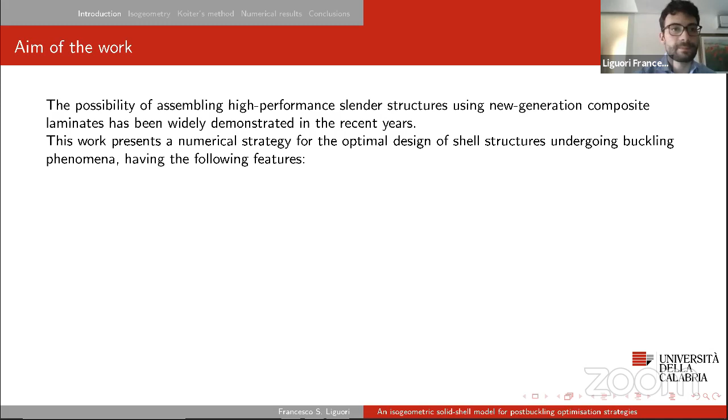The aim of the work is to present a numerical model to be used within post-buckling optimization strategies. The main feature of this model is that it is able to capture the fully nonlinear post-buckling behavior of the structure. It allows us to account for the worst case imperfection, and the strategy is applicable to general shaped structures.

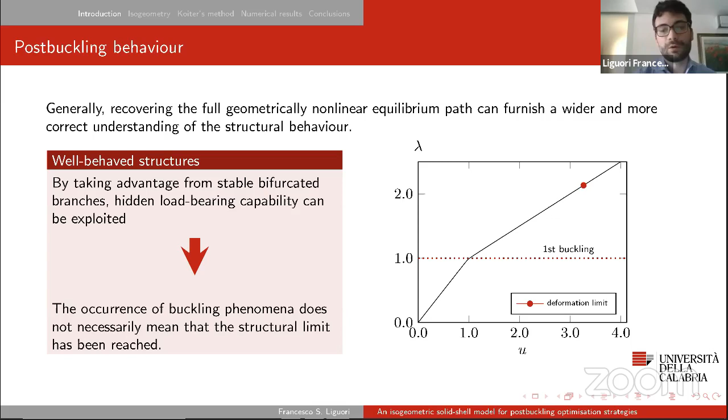Usually when designing a shell structure, the lowest buckling load is the reference load. However, there are cases in which this load is not a proper safe indicator, as the one reported here in the figure. Actually, also in the case of well-behaved structures, we can take advantage of stable bifurcated branches to exploit extra load-bearing capability.

When making a post-buckling optimization, we have two main issues. The first regards the discretization techniques, because when designing full-scale structures we can end up with many degrees of freedom in the numerical problem. On the other side, the evaluation of the equilibrium path can be computationally expensive, especially when the effect of many imperfections needs to be accounted for during the optimization.

With this work, we propose a strategy that makes use of isogeometric analysis to reduce the number of degrees of freedom of the numerical problem. On the other side, we make use of a specialized version of the Koiter method to predict the initial post-buckling behavior.

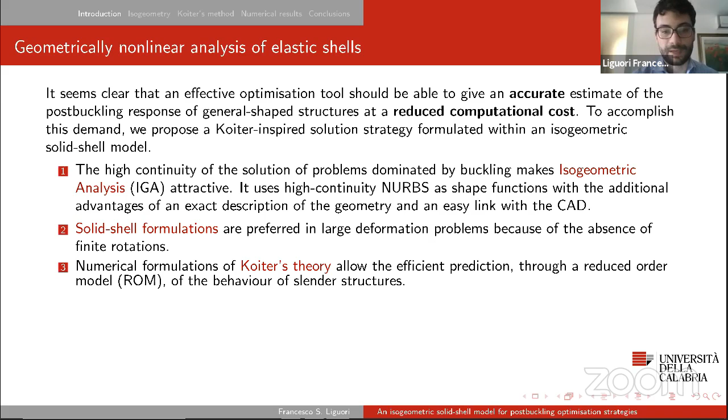Here there are some details about the solid shell isogeometric model. Everything is pretty standard, except for the MIP formulation, a strategy that allows us to preserve all the advantages of using a mixed format in geometrically nonlinear analysis within a displacement-based model.

To perform numerical integration, we make use of a patchwise integration scheme. In doing so, we have two main advantages: first, we can reduce the computational cost of the overall formulation, and then by using a reduced integration scheme, we can eliminate interpolation locking.

The Koiter method is commonly used in optimization of shell structures. However, many of the implementations regard simple geometries and simple post-buckling behavior.

With the version we used here, we can account for complex shaped structures based on the solid shell description and the isogeometric model, and capture nonlinear interaction between buckling modes.

At the end of the day, the Koiter method gives us a reduced system of equilibrium equations that can be easily solved. In this way, the solution of the geometrically nonlinear analysis is made efficient.

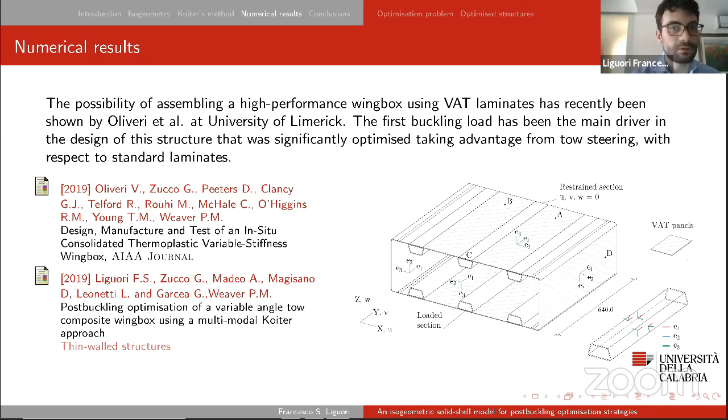I'm about to conclude with some numerical results. They concern the optimization of a composite wing box made of new generation composite material. This is the optimization problem: we want to minimize the out-of-plane displacement of the skin bay under some geometrical, technological, and mechanical constraints.

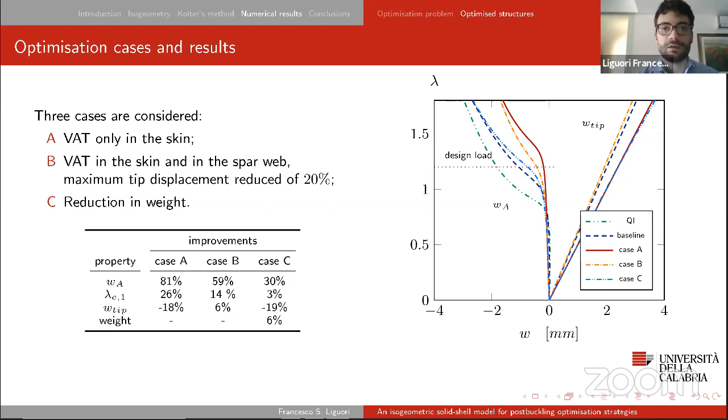But in all cases, we can see how we get good improvements with respect to the baseline solution. So, in a certain sense, we demonstrate that with this solid shell model based on isogeometric analysis and the Koiter method, we can optimize a full-scale structure in a reasonably computational time. So thank you very much.

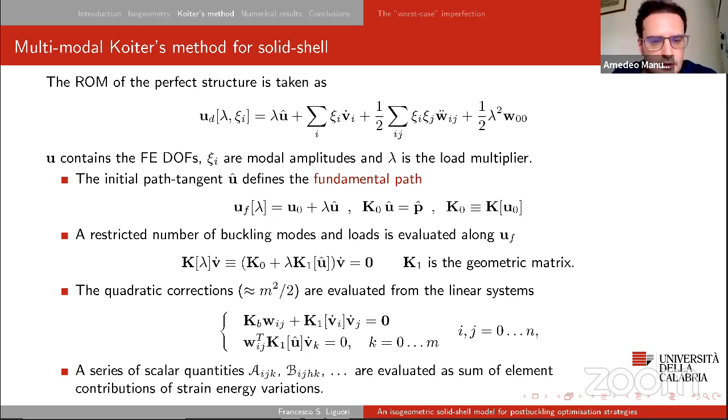Yes, I'm here. Okay, a GDQ-based study of the mixed mode interfacial response of composite specimens with a curved geometry. Okay, nice to see you, please.

Thank you. Ladies and gentlemen, good afternoon. The main topic of the talk is about a numerical study for the mixed mode... There is a noise, I don't know why. Maybe you are in the same room with Francesco, so one of the two has to stop or lower the volume. Let's try again, better to switch off the volume of one of the two devices.

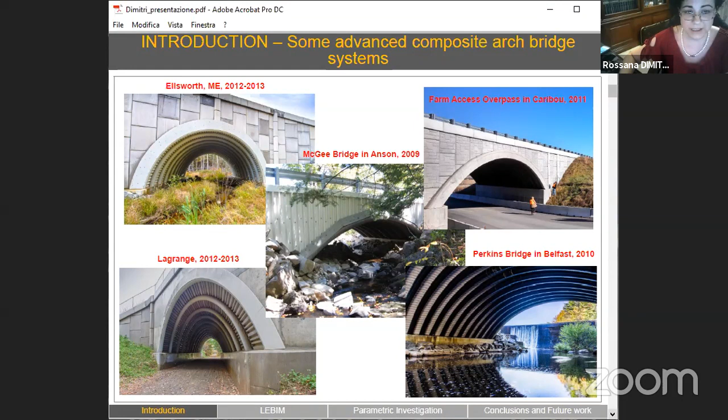As you can see here, for example, the same numerical approach could be used also to model simply supported curved beams with a vertical loaded distribution, as you can see here, in some practical examples of composite arch bridge systems.

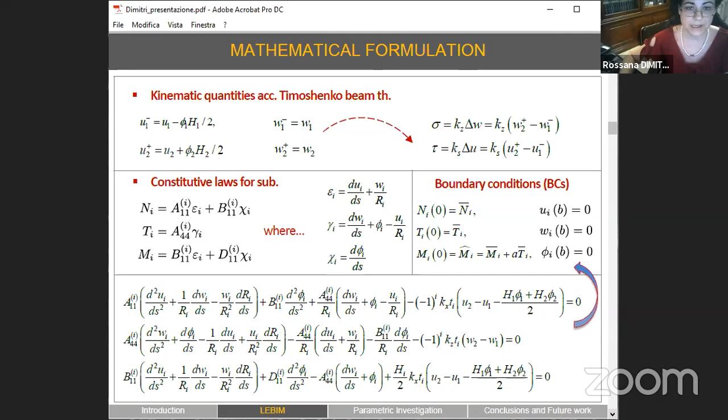We have to define the equilibrium equations for each sublaminate, at least in the adhesive portion. We then introduce the constitutive laws for each arm, together with the boundary conditions, and by combination of all these relations, we get the following set of differential equations, written in a coupled sense. These equations are expressed by means of the kinematic quantities, both in mode 1 and mode 2, in the longitudinal and orthogonal direction, in a coupled sense. So this set of equations is very difficult to solve in closed form. Here we provide just closed form solutions for a simple case.

I mean, a straight orthotropic double cantilever beam when the radius of curvature tends to infinite. In this case, we have to apply a suitable change of variables where the interfacial stresses are selected as primary unknowns.

After a long mathematical manipulation, which I don't have time to discuss, at the end we have the following set of relations which are uncoupled and easy to solve. After integration, we can obtain the closed form solution for the interfacial stresses as well as for the internal forces and the kinematic quantities, as you can see here.

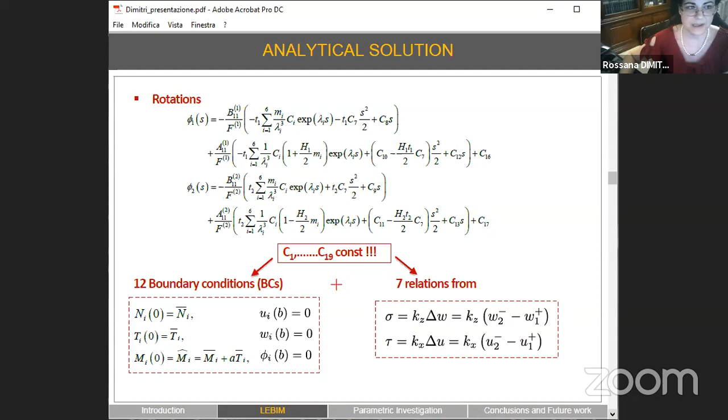In the same manner, we can find the closed form solutions also for all the other quantities in a static and energy sense, which are required to appropriately define the failure criterion to follow the delamination process.

As far as the numerical solution is concerned, the fundamental system of equations together with the boundary conditions can be easily solved in discrete form by applying the GDQ technique, which discretizes the nth order derivative of a function as a weighted linear sum of the functional values at fixed collocation points, by means of weighting coefficients determined through the recursive formula from the literature.

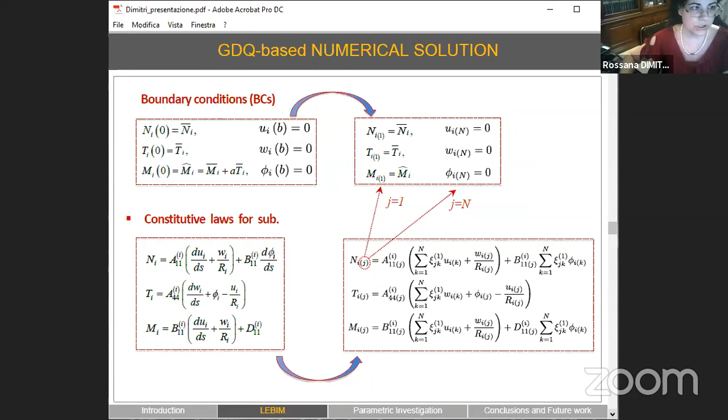Here are the discretized governing equations of the problem, together with the discretized form for the boundary conditions and the constitutive laws. In a context where the placement of grid points within the domain can significantly affect the accuracy of results,

we start the numerical study with a convergence analysis by considering the traction vector along the adhesive interface, defined by means of its normal and tangential components, and compute the L2 norm of the error, as you can see here, for different discretizations.

Here are the plots in a bilogarithmic way, where you can see the very fast rate of convergence of the numerical solutions for the different discretizations, where a very limited number of collocation points, ranging from 65 to 81 in our case, is required to obtain very accurate results.

So in the following, we continue to consider this optimum number of collocation points, equal to 65, for our analysis.

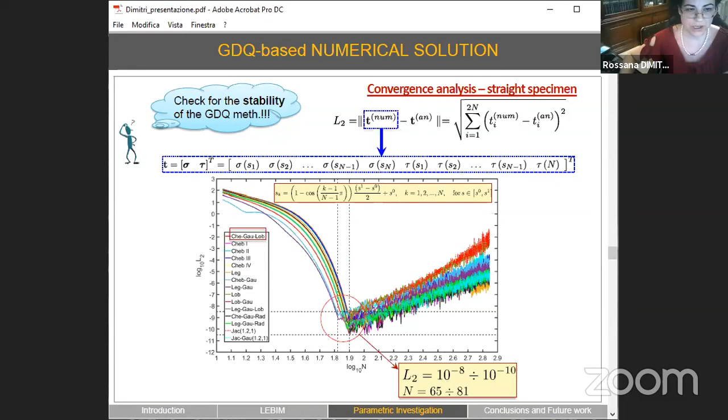Now we extend the numerical analysis of the adhesive interface response to curved members with constant and varying radius of curvature, where you can see here the list of five different geometries analyzed, including circular, parabolic, elliptical, catenary, and so on — just some examples among the most common geometrical shapes for structural applications, where the circular shape is considered the reference one.

For an orthotropic curved specimen in mixed mode loading condition, we plot the interfacial stresses first against the dimensionless bonding length for this unprecracked specimen and for different curved geometries.

You can notice the coexistence of a non-null value for both sigma and tau for all the geometries, which confirms the mixed mode interfacial behavior due to the mixed mode loading condition, but not only — also due to the geometrical curvature.

You can see also the mechanical response in a kinematic sense, where all the kinematic quantities are plotted here for different geometries, and where all the curves reflect the great sensitivity of the mixed mode behavior to its geometrical shape.

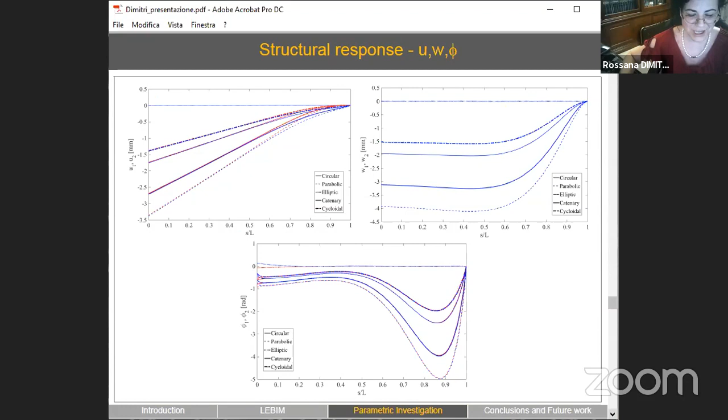For this limit case, among a large parametric investigation, I also show some results obtained by comparing the elliptical shape against the circular one, the reference one, for different radii of curvature.

While maintaining fixed the length span and varying the values of the rise, the last value of the rise here considered corresponds to the length midspan of the curved specimen.

As you can see here, for an increased value of the rise, both stress components maintain almost the same peak value at the crack tip and decay to zero with an oscillating behavior within a shorter distance from it, in a more localized zone.

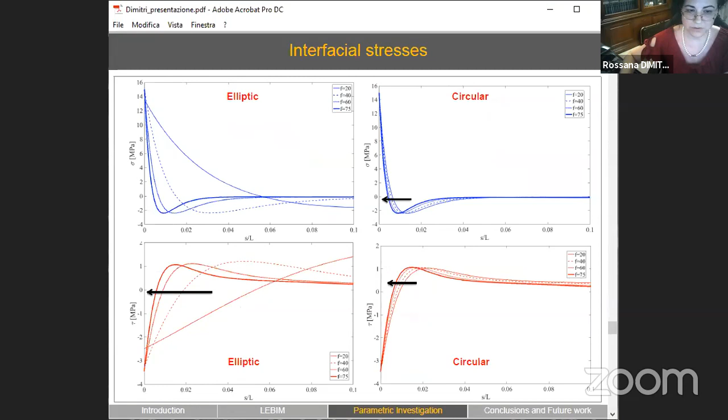The effect of the radius of curvature can be seen also here in a static and kinematic sense, where an increased rise makes the oscillating behavior of the internal action even more localized at the crack tip, while an increased value of the rise always decreases the overall deformability of the specimens.

Look at here, where in particular you can see the bold lines between both the elliptic and the circular shape are exactly the same, at least for the last value of the rise, because in this case the elliptic shape tends to revert to the circular one.

So we have proved the sensitivity of the delamination response for different curvatures and shapes for the curved specimen, which could be of great interest for design applications of adhesive joints and curved members. And we have also proved the efficiency of the generalized differential quadrature approach to treat this kind of problem.

A possible further extension of the work could include the nonlinear softening branch, typical of cohesive zone modeling for fracture mechanics problems, and possibly extend this kind of numerical method to shell structures. Thank you very much for your attention.

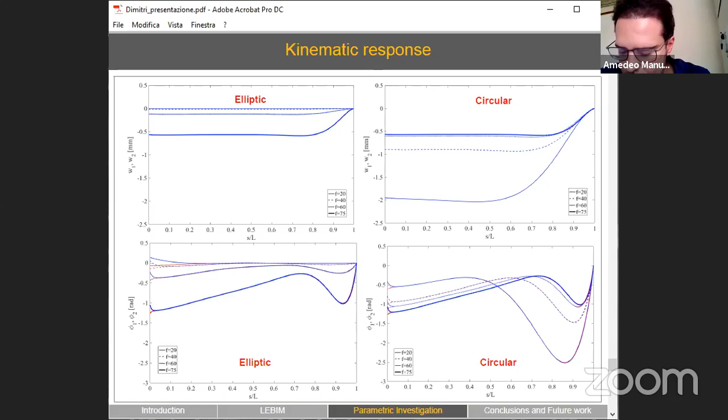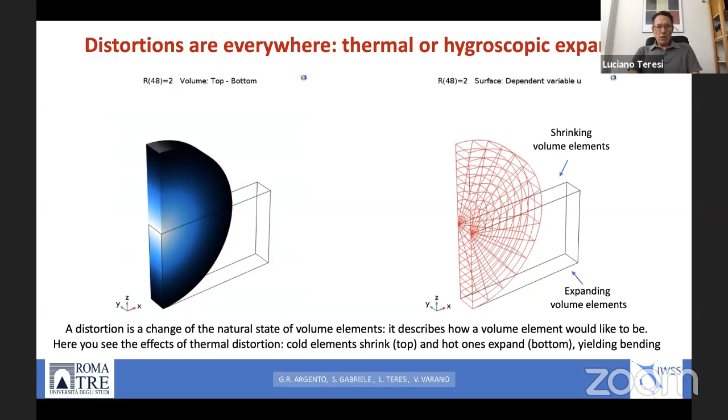Growth is a very general word, and different contexts use different words. For an engineer, growth is simply a pre-strain, and the pre-strain can be very large. Here is an example of using pre-strains, or distortion, to change the shape of a solid. On the left you see the huge displacement of a solid, and on the right you see the cause of this huge displacement: a growth, a distortion, which is different along the thickness. At the bottom, volume elements become larger, and at the top they become smaller. Because of that, you can change the shape, and it is quite easy to change the shape of a solid using this technique.

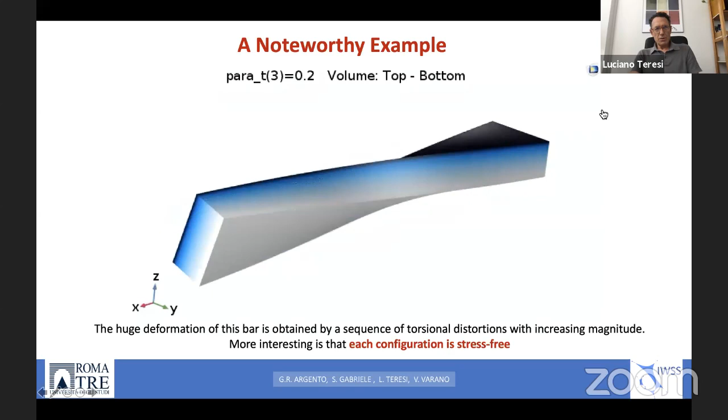This deformation is very large, and it would be very difficult to get the same deformation applying loads, because you would have to use live loads, and the loads must change during the deformation - so it's very difficult. Using this approach, it is very easy, and also easy from the computational point of view. You can get many different shapings. Here you see another very interesting shaping.

What you see is a sequence of configurations. Each configuration corresponds to a given distortion, and importantly this distortion is compatible. It means that all these shapes are stress-free.

There is no stress in this solid, and this is the goal of the growth of a living tissue. Growth must not induce stress in the tissue. You want only to change the shape, but not the elastic energy. You don't want to stress the solid.

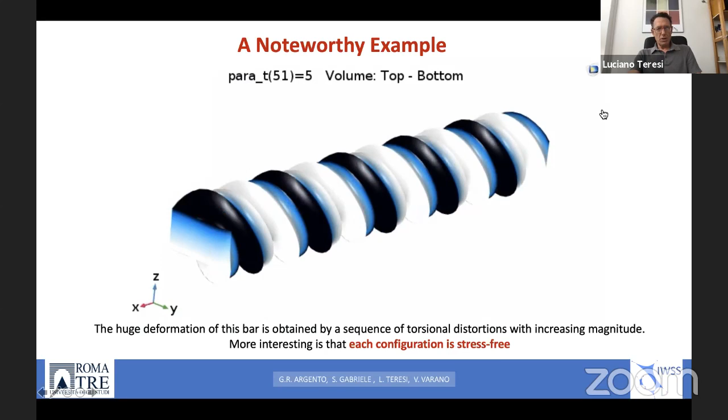Here is another example. You can design a morphing with distortion. So here we design the formation of a ribbon, and you will see how this flat bar will round up into a cylinder, and eventually you get something very similar to a ribbon. Again, it's very easy to get this change of shape.

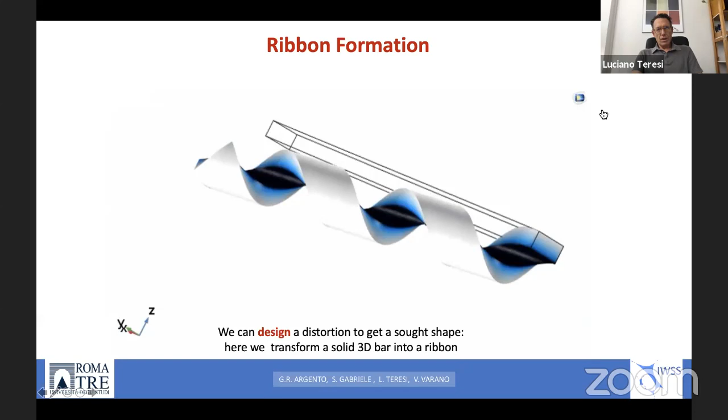Now you can use this technique also for shells, and here is our contribution. A shell is a very special 3-dimensional solid. Essentially it's a surface with an extrusion along the normal, so you can use this notion of 3-dimensional distortion also for a shell-like body.

These two fundamental forms: the first is related to the membranal strain, the second to the bending, the curvature of the middle surface. You can play with these new degrees of freedom, and for you these fundamental forms are targets.

So what you want to do is morph a shell such that its fundamental forms are as close as possible to these two targets, the first and second fundamental forms. Here is an example, very similar to the previous one. Now I am morphing a shell. So this is a shell.

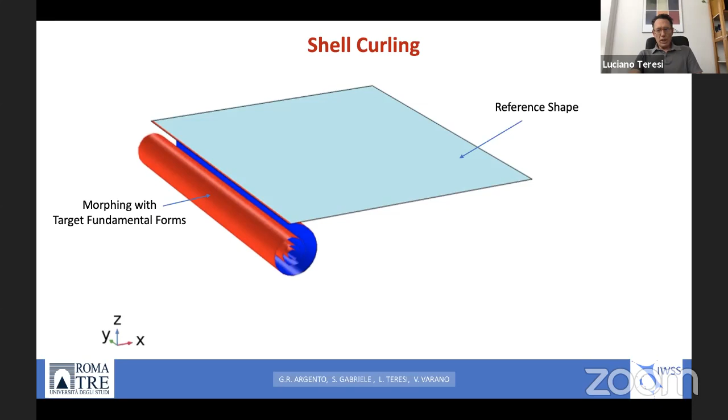This is my last slide. The final slide is just references, and I thank you for the attention.

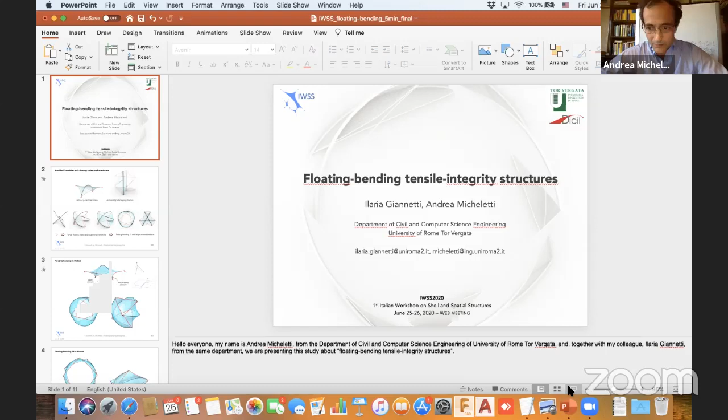Yes, please Andrea. Yes, I need to move this. Can you see my screen? Yes, very well. Can you hear me clearly?

Okay, so I'm presenting a joint work with Ilaria Giannetti, and we are both from the Department of Civil and Computer Science Engineering of University of Rome Tor Vergata. It's a conceptual work about floating bending tensile integrity structures.

It comes from the observation that if you have a diamond type tensegrity structure, we can see this diamond shape formed by four cables connected to one of the bars. And then you can see some similarities with arch-supported membranes, like this one I sketched here.

So the idea is to modify the tensegrity modules by curving the struts and adding the membranes. So we patch each diamond of the module with an arch-supported membrane, and by doing so we can transform, for example, the classical T3 module, which is a well-known tensegrity module, into this structure.

And then here I put again the classical T3 module to compare the figures, to see that the internal volume is much larger. So one of the features of this tensegrity module is that the bars are always inside the structure and cables outside, and then it's difficult to exploit them.

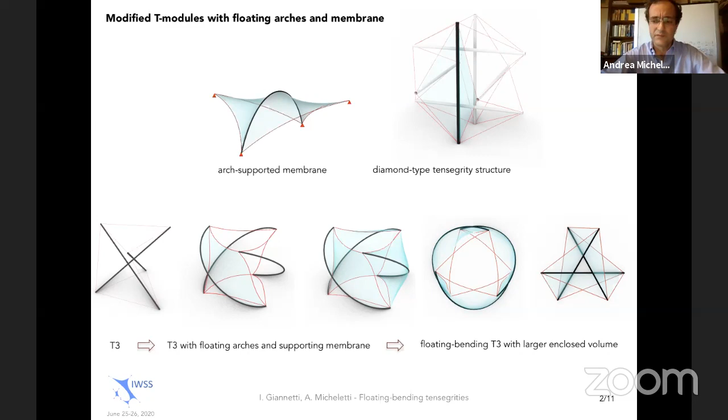And then so the name—we preserve the tensile integrity of cables and membrane, and we suspend the arches. So the first thing we did is to try to do the form finding in the simplest possible way. We use MATLAB, and then we use the membrane elements and cable elements.

As simple constant stress elements, and we added the stick and spring element for the arch. Basically it's a normal linear element, but we attach to it two springs. One—let's say we have a spring between one element and the next one, which takes into account the bending with this rotational spring. And also, if you have three consecutive elements, we consider the dihedral angle, which we can define with three elements, and so there is another spring.

And in this way we have a simple model. We can minimize the elastic—it's a linearly elastic model—considering a large displacement regime. And so we minimize the energy and we find the equilibrium shape.

And so this is the result for the example I showed before, and this is the equilibrium geometry we obtained. Then we did the same with another module, which is called the T4 module. This is one first approach. Then after this, we saw that there is an equilibrium shape.

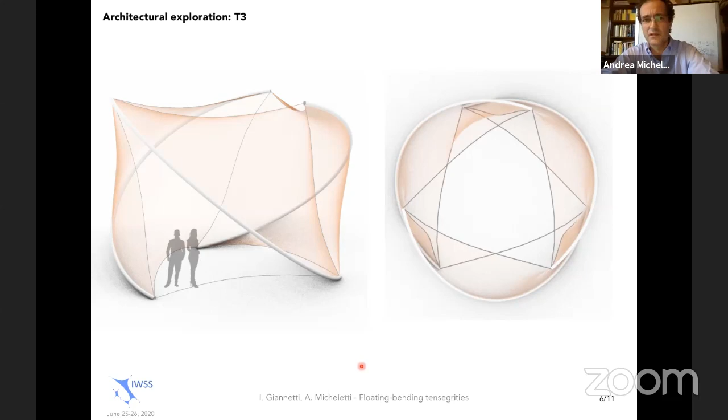And then we tried to see some simple applications to use these shapes for some architectural application. This is for a pavilion, and this one can be, for example, for social distancing.

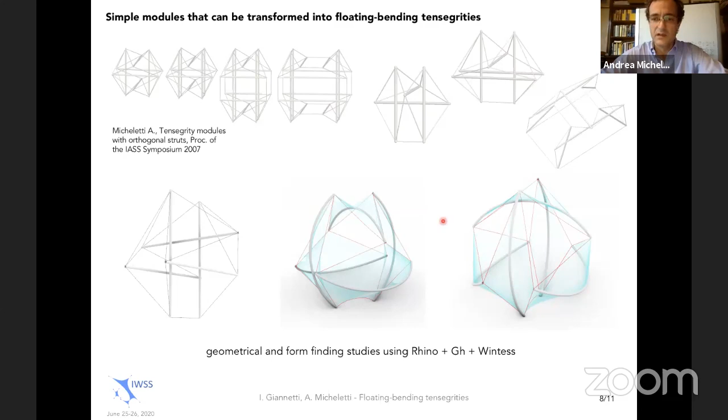For example, this one we can transform into a floating bending tensegrity structure. Tensegrity systems have sometimes been regarded as balloons by Buckminster Fuller, because you always have tension outside and compression inside, like in a balloon with compressed air inside.

And then you can also imagine that you can transform this into a floating bending tensegrity structure.

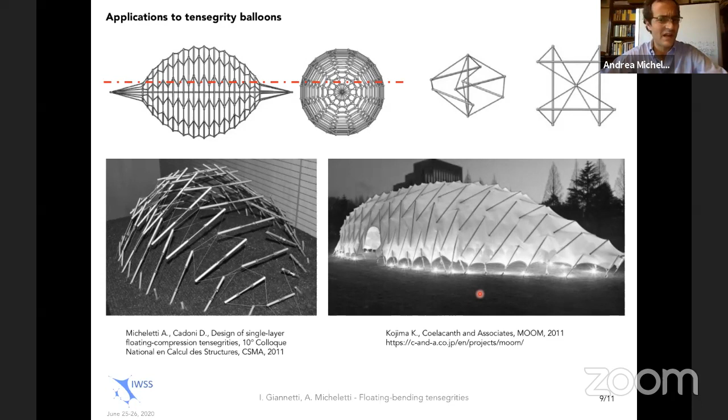We are trying to study this problem. It's very interesting. Let me go back a second to this one - you can see here a continuous surface, pre-stressed surface with singularities. There are two types of singularities, one for the cables, the other for the arches.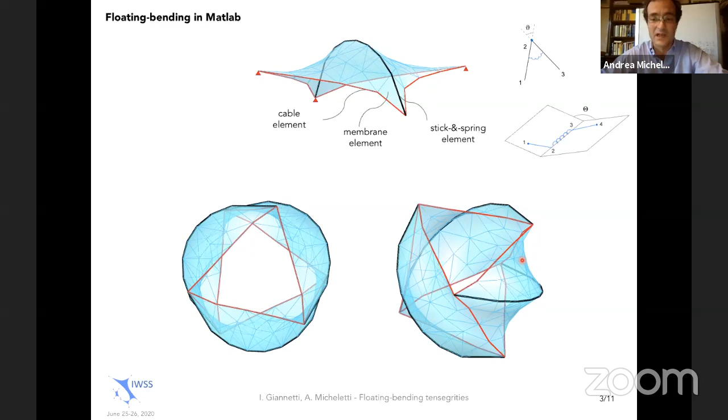Tensairity, where you also have this structure, contains an inflated balloon with reinforcement, so there are some similarities. This is a nice pavilion which was awarded last year at the IASS in Barcelona, which is not a diamond type, however. So the question is whether you can transform this into a floating bending structure.

So the main questions are: can we have funicular arches? Or in any case, we would like to minimize bending and torsion in these elements. And also we need to study buckling and superstability of this - superstability is something well known in the literature.

And also we would like to do a trade-off analysis between structural efficiency and deployability.

I want to thank again Professor Ramon Sastre and also Diana Peña for how to use the software, and also Professor Fraternali for useful comments during the preparation of this study, and also the students who worked on this subject over the years.

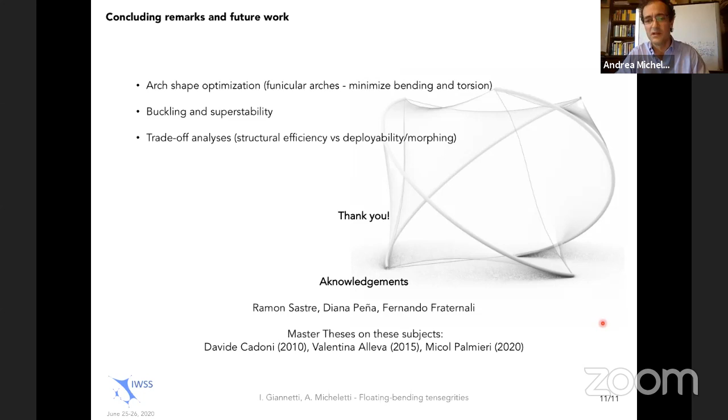I don't know if you get a linear equation, but you probably need to switch between techniques for form finding. The problem here is you have simultaneously tension and compression, so it's a bit more complicated with respect to tensile structure or masonry structure. Usually what is done is to switch between equilibrium operator and stress operator, which are known terminology in the literature. You need to define a stress operator. The equilibrium operator is easy to generalize in this case, but the stress operator is harder to generalize for these stick and spring elements. That's a quick answer, let's say.

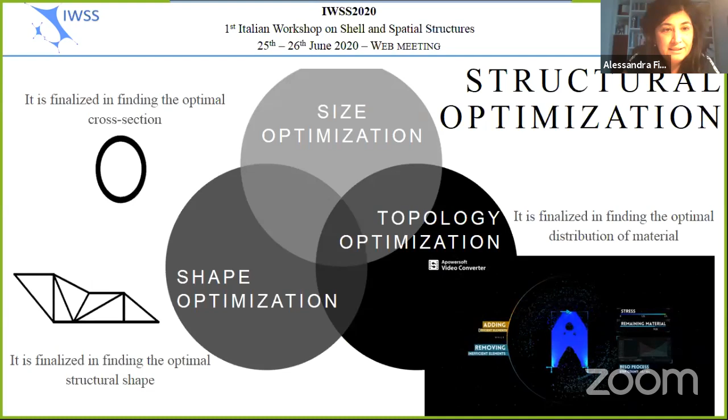The design optimization refers to size, shape, and topology. The optimal solution is obtained by a differential evolutionary genetic algorithm named Galapagos, where a suitable combination of mutation and crossover operators is adopted to achieve the best solution. The Galapagos solver is implemented within the Grasshopper working environment, an innovative parametric Rhino design tool. The analysis concerns three different typologies of simply supported steel beams: a truss scheme, an arch with orthogonal ropes, and a network arch. The span length is equal to 20 meters.

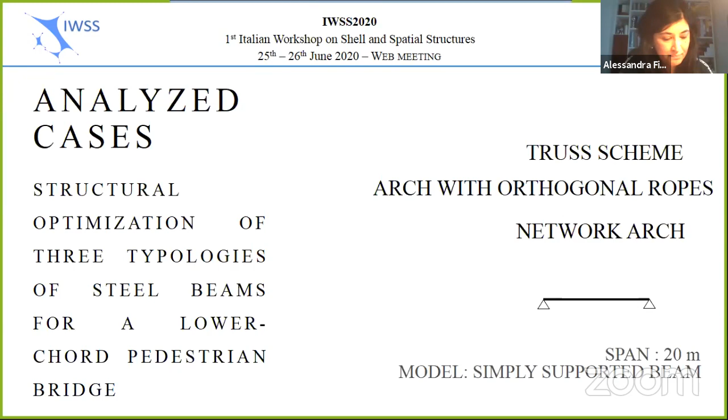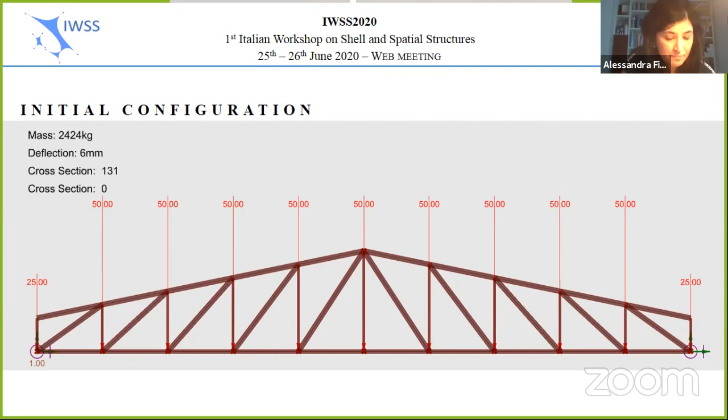Starting from the truss scheme, after implementing the geometrical model through the workflow in Grasshopper, and in the same way the constraints and loads, an initial configuration with the loads is defined. The minimum weight optimum design is posed as a single objective optimization problem, subject to constraints formulated in accordance with current Eurocode 3. So we formulate the optimization problem as finding the best vector of input variables to minimize the weight, satisfying the constraints imposed by Eurocode 3.

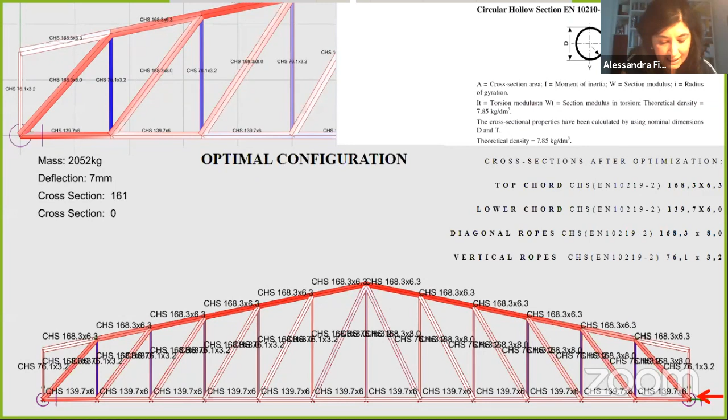Here you can see the optimization algorithm. In this case the design input variables are represented by the geometrical dimensions of the cross sections of the different components of the truss, and by the outer and internal arrangements of elements. This is the optimal configuration, and these are the optimal circular cross sections selected by the algorithm, along with the normal and bending stresses.

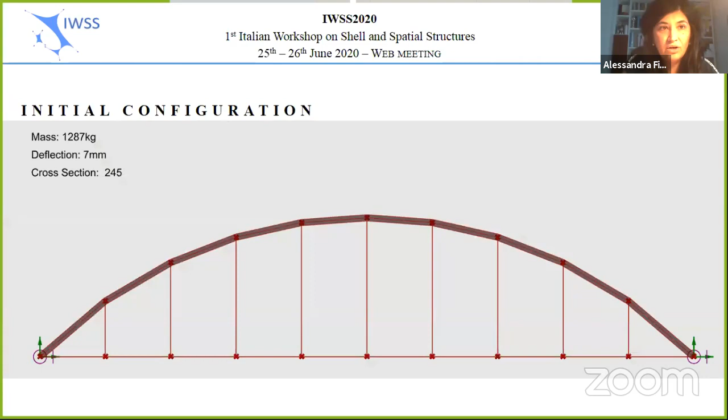The same procedure is applied for the arch with orthogonal ropes. After definition of the geometrical model, constraints, loads, and an initial configuration with loads, the optimization procedure is run. In this case, the design variables are represented by the cross sections of different components, by the arch curvature, and by the internal arrangements of elements.

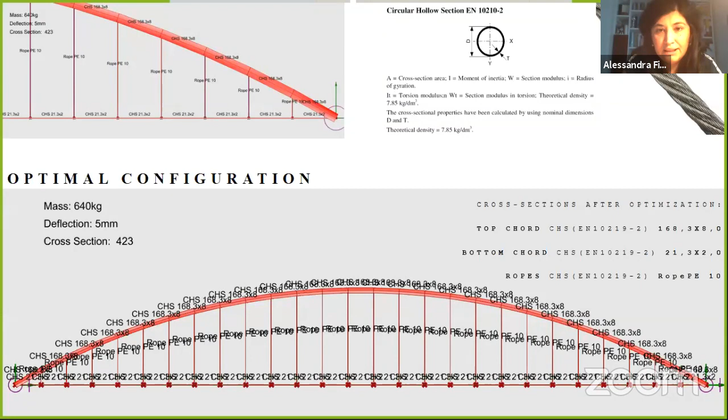This is the optimal configuration, with cross sections according to Eurocode 3 prescriptions, and normal and bending stresses. Finally, the network arch is analyzed in the same way, and again the design variables are represented by the cross sections of different components, the arch curvature, and the internal arrangements of elements. This is the optimal configuration with cross sections and normal and bending stresses.

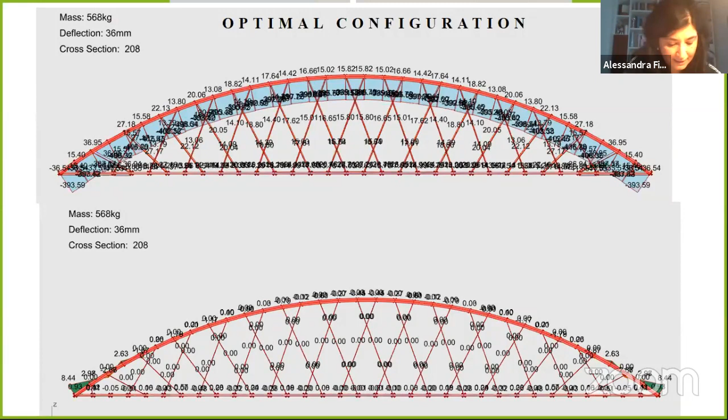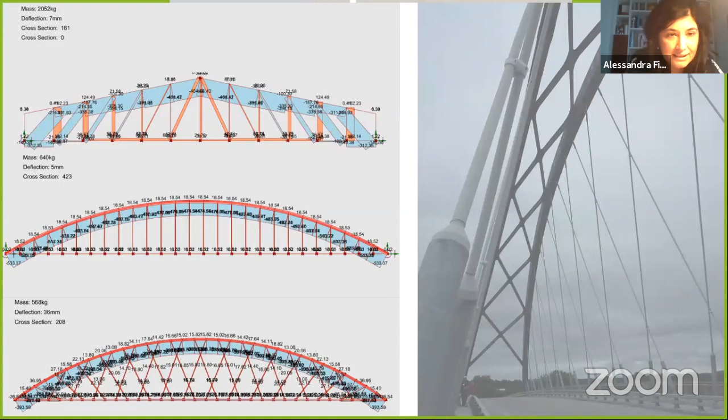By comparing the previous results, some considerations can be drawn. The network arch results to be the best among the solutions, since it is characterized by minimum weight and stresses. Moreover, the optimal solution is consistent with some previous literature studies. The cross section of the arch results bigger than that of the bottom chord, while diagonals are characterized by the smallest values of cross-section width and thickness, according to the distribution of intensity and stresses. The optimal configuration confirms that optimal arches are always rather shallow, in accordance with analytical evidence we recently achieved. Thank you for your attention.

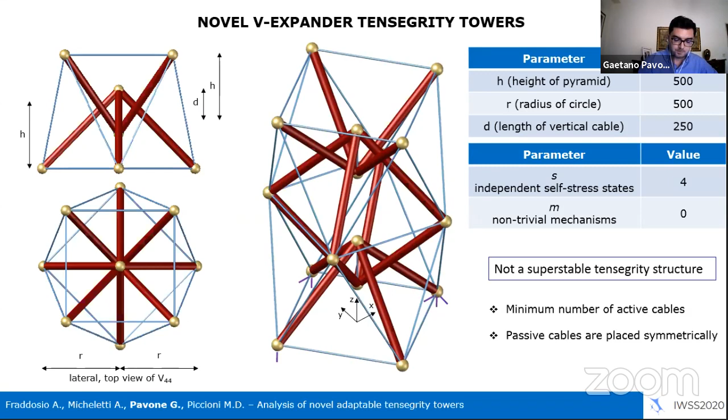The modular tower analyzed is composed of 2 modules sharing 4 horizontal cables, and the tower has 4 independent self-stress states and no mechanisms in 3-dimensional space. The self-stress states are not localized in each module; indeed, each of them involves different elements of the tensegrity tower.

This implies that to change the length of a not-shared element, it is necessary to adjust not only the length of the element belonging to the same module. Support conditions of the tower are located at the base nodes, and the tower is opportunely constrained to remove the rigid body motions in space. Moreover, such tensegrity tower is not a superstable tensegrity structure.

Different novel shape-changing V-expander tensegrity towers can be designed by choosing appropriate sets of active and passive cables respectively, in order to achieve various configurations. In this work, we are interested in seeking how it is possible to obtain different shape changes by means of the minimum number of active cables.

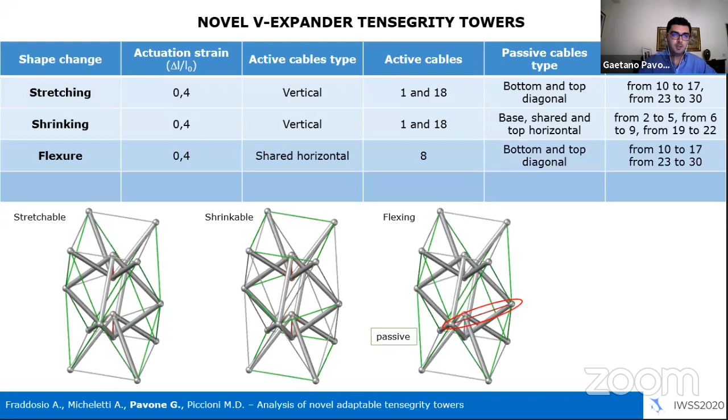It is worth noting that active and ordinary cables have the same material stiffness properties, while passive cables are characterized by very small Young's modulus. An initial symmetric self-stress stable configuration can be obtained by applying an initial prestrain at symmetrically placed passive cables equal to 0.2. Shape change of the towers can be obtained by shortening specified active cables by a predefined amount equal to 0.4. In this preliminary work, we focus our attention on the following shape changes: stretching, shrinking, flexure, and torsion.

Stretchable tensegrity towers are characterized by the fact that all elements tend to linearly increase their axial forces. In particular, struts, shared horizontal cables, and vertical cables achieve internal forces higher than the initial stress, up to 50%. A slight variation of tensile internal forces can be observed in the remaining horizontal and diagonal cables. The total elongation of the structure, equal to about 13%, can be measured for these towers.

Shrinkable tensegrity towers show different behavior of the struts. Compressive internal forces in the outer struts are greater in absolute value than those of inner struts. Moreover, inner struts and vertical cables have the same behavior in absolute value: their internal forces increase until actuation strain is smaller than about 0.2, and then decrease. Shared horizontal cables increase their tensile internal forces by about 50%, and the length of the shared horizontal cables increases by about 15%.

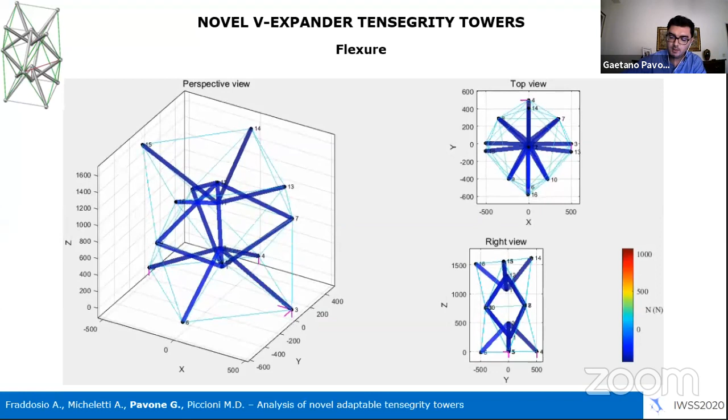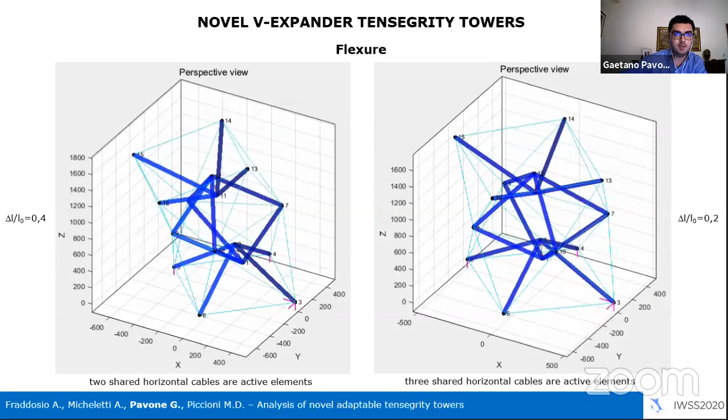Flexing tensegrity towers show that axial forces in vertical cables increase, and axial forces in the elements are strictly related to the choice of active and passive cables. In this example, we consider one of the shared horizontal cables as an active cable, but we can also choose different active cables, different sets of active cables. On the left, two shared horizontal cables are considered as active cables. On the right, three shared horizontal cables are used in order to manage the direction of the bending and flexing of the tensegrity towers.

Finally, twistable tensegrity towers are characterized by a clockwise rotation of about 5 degrees. Bottom struts increase their compressive internal forces in absolute value, while internal forces in the top struts slightly decrease. It can be observed that cables belonging to the bottom module increase their internal axial forces. This is due to the activation of the bottom active cables.

Finally, preliminary analysis of shape change of novel adaptable tensegrity towers has been performed by means of cable actuation. Different kinds of shape change have been considered, like stretching, shrinking, flexure, and torsion. The choices of the active cables as well as the passive cables satisfy the following criteria: minimum number of active cables, and passive cables placed in symmetric positions. Further analysis will be conducted in order to investigate the influence of geometrical and material parameters on the shape change capabilities of the tensegrity towers.

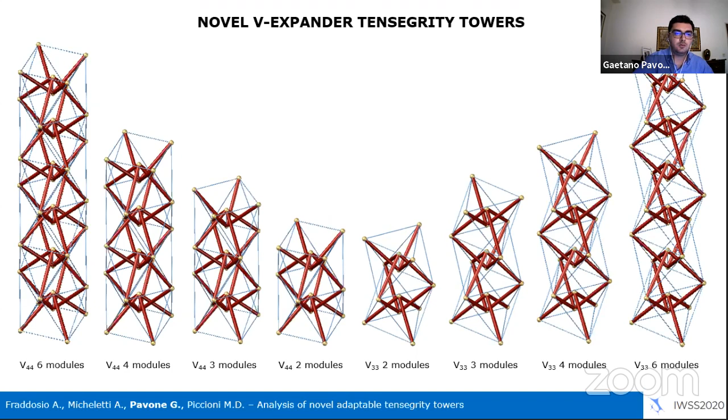Different topologies can be considered for the elementary cell of the tower, with 2, 3, or 6 struts joined at the nodes of the vertical cables respectively. In this slide, we show how the novel V-expander tensegrity cells can be assembled for a tower with 2, 3, 4, and 6 modules assembled longitudinally, and for example, a grid with 8x8 modules.

The determination of the minimum number of active cables allowing for multiple shape changes, and the effects of different load conditions, will be numerically and experimentally investigated in our laboratory at the Polytechnic University of Bari. Thank you for your attention.

Thank you so much, Gaetano. Very nice work, very interesting. I have a question from Ramarao Mallela. I read for you. Yes.

How strong are the tensegrity towers with respect to torsion? In case this tower can resist torsion, perhaps it can be used to resist torsion due to wind loads subjected to hurricanes and cyclones.

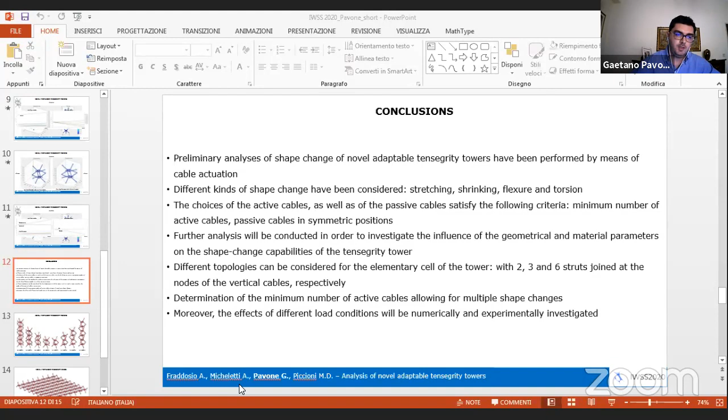So this is a preliminary work, and the effect of different load conditions will be numerically investigated in the future. If we consider the load due to wind subjected to hurricanes and cyclones, we would have to perform a further analysis in order to investigate this kind of load.

Thank you so much. This is still an exploratory study, so we didn't put wind load yet on the towers. But of course, if you make the elements big enough and strong enough, it depends how much bigger—maybe if it weighs more than a conventional structure, maybe it's not convenient. Let's say these towers are good for soft robots, so that maybe for human interaction, they can get stiffer or softer according to various situations. That's the preferred application in the literature.

Yes, of course. Thanks, Andrea. Okay, we can move on.

Very interesting paper entitled Virtual Element Method for Solid and Structural Mechanics, by Edoardo Artioli.

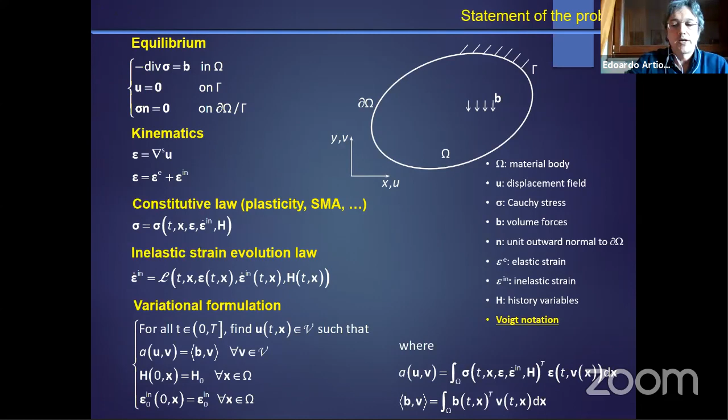Very much in the classical FE fashion, we build local approximations for our displacement field starting from the element level, the polygon level. We call it the virtual admissible displacement field, VH, built by choosing a positive integer k representing the order of accuracy of the method. This is the collection of vector-valued functions that have sufficient regularity over the polygon domain and are defined as follows.

They have a Laplacian which is a polynomial of degree up to k-2 over the element, and are a polynomial of degree k over the element boundary. That's all we know about our virtual element functions. So the idea is that for functions VH, they are totally known explicitly on the element boundary, fully implicit—meaning not known inside the element—and globally continuous over the element boundary.

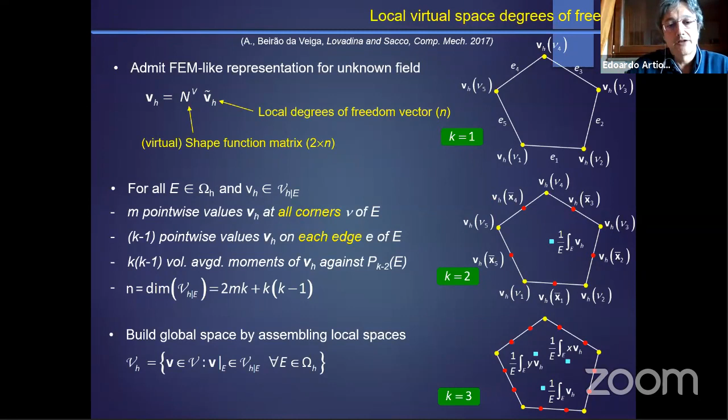The main message from this quite large gallery of numerical experiments is that we have assessed the method's accuracy, precision, and robustness, and its versatility with respect to the chosen constitutive model. We've found that the method shows low to no sensitivity with respect to mesh distortion, and more importantly, anything connected to a standard nonlinear FEM implementation can still be retained.

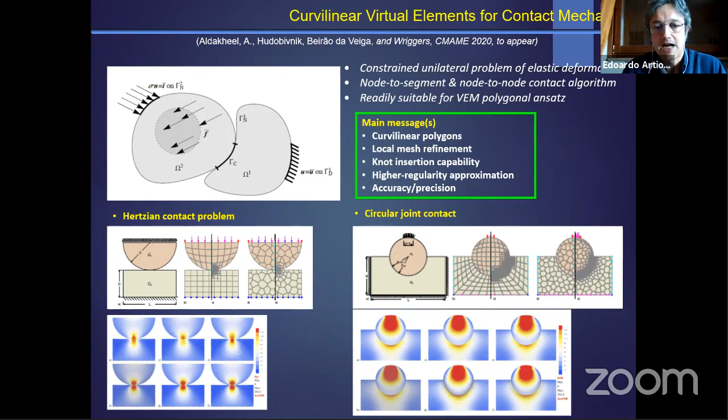Moving on, another interesting area that we have been recently working on with Professor Sacco from the University of Naples Federico II, and Professor Marfia from the University of Roma III, is the development of a VEM-based fracture path tracking algorithm for 2D cohesive fracture. Here again you can see that we have exploited some of the key features granted by the method: the possibility of dealing with evolving interfaces within the domain of interest, and also the possibility of having refined forward and backward mesh refinement strategies for an efficient fracture path tracking algorithm.

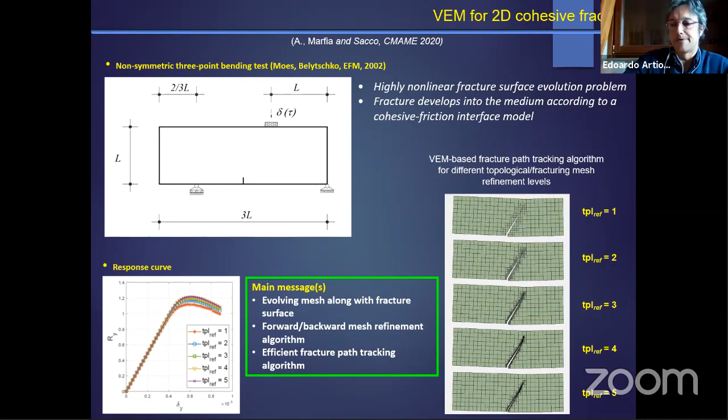Another interesting field we have been involved in recently is related to the computational homogenization of fiber reinforced composite materials, either with a double periodic arrangement or in a random arrangement. Without giving too much detail, this problem again leads to solving a standard elliptic problem over a complex 2D domain, which is represented here, which is the unit cell domain for the composite material.

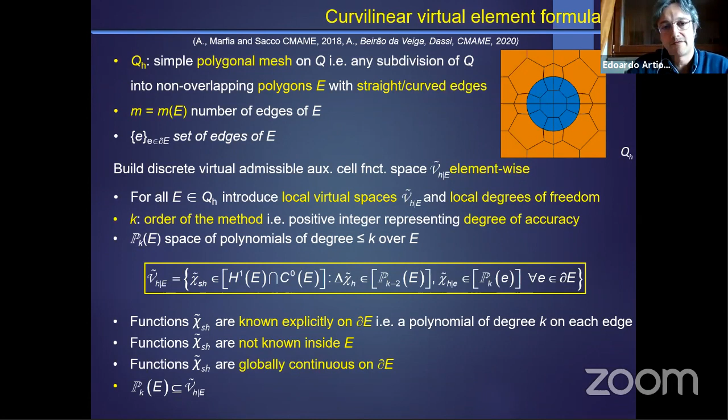We proved that using virtual elements is quite an efficient strategy to derive the solution to such a problem, for many reasons. As you can see here, we have basically a very similar construction of the method with respect to the initial case. In this case, we have the capability of exactly reproducing the curvilinear geometry of the interface between the fibers and the matrix, and pretty much everything is very close, very similar to the initially presented construction. We have tested the method for different types of meshes, for different orders, higher orders, confirming accuracy and convergence.

And lately, with Lourenço Beirão da Veiga and Marco Verani from the Politecnico in Milano... You are over 10 minutes. Okay, just one more slide, and I'm done.

Yes, we have extended the analysis to random composite materials and to more involved complex fiber cross sections, getting quite good results as well.

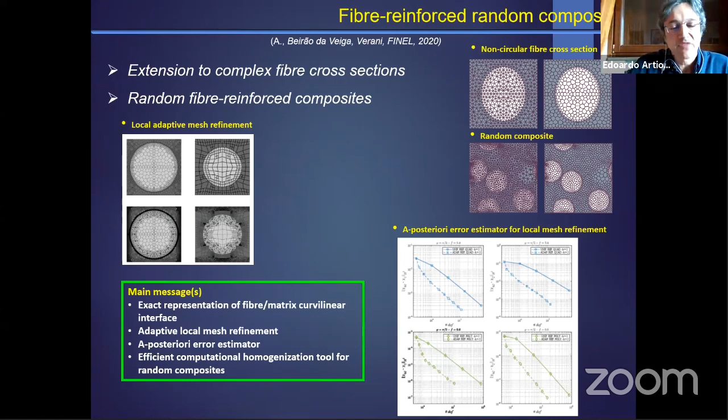The last application, related to plate problems, is done in collaboration with Professor Taylor and Lourenço Beirão da Veiga, and is basically a technique that we have devised, borrowing the so-called linked interpolation from finite element analysis, which in this case proved quite efficient in deriving shear locking free plate virtual elements.

Just a very quick conclusion: we think that the VEM is a numerical tool with potential in solving applied mechanics problems, and that there are many features that make it quite interesting as a potential alternative to standard finite element methods, and that there's a lot more to be explored in this field. Thank you for your attention.

Thank you so much, Edoardo. I think you have really an encyclopedic knowledge about virtual element method. Are there any questions about this very interesting paper? No question, so if you have a question please post it on chat and we move on. Sorry Edoardo, because we are a little bit late. Sure, okay, thank you, thank you so much.

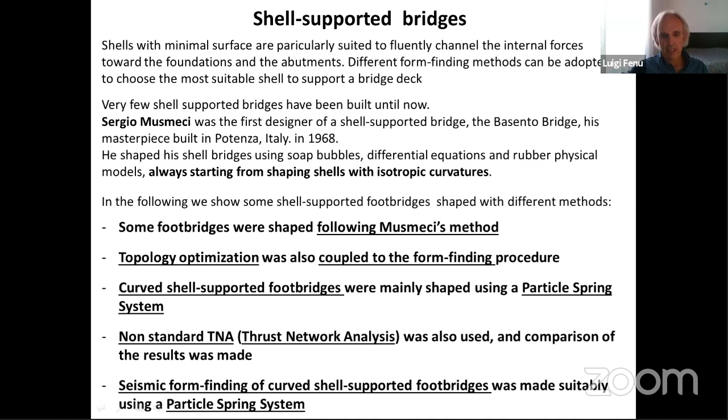Finally, we are now studying the seismic form finding of curved shell-supported footbridges, mainly using a particle spring system. Here we see our initial work, following Musmeci's method of shaping an isotropic surface and then reducing the transverse curvature. Some years later, we tried to follow his method and to shape a footbridge.

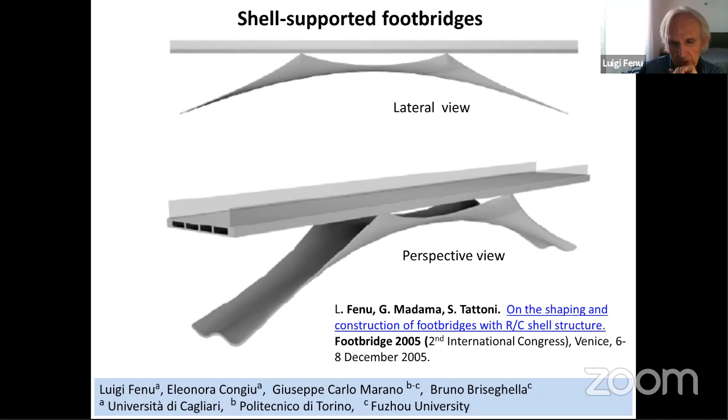We also studied how to build it using ferrocement, initially with a tension structure made of steel wires, and then obtaining ferrocement by spraying the concrete to finally obtain the shell. This work is from 2005, and this is the footbridge.

Then we applied topology optimization together with the form finding method. This method was also applied to a real bridge, the Sandona Bridge, close to Venice.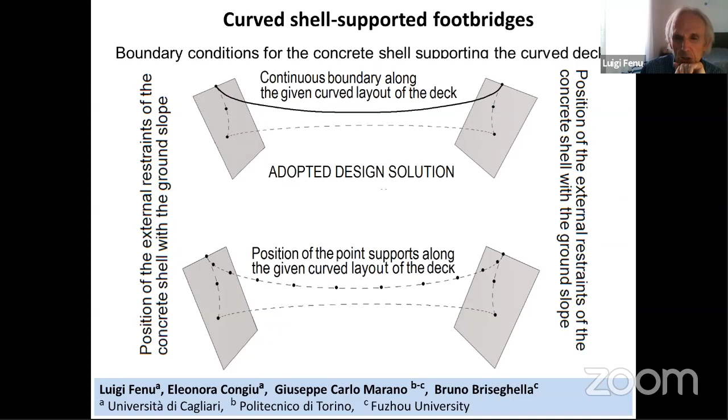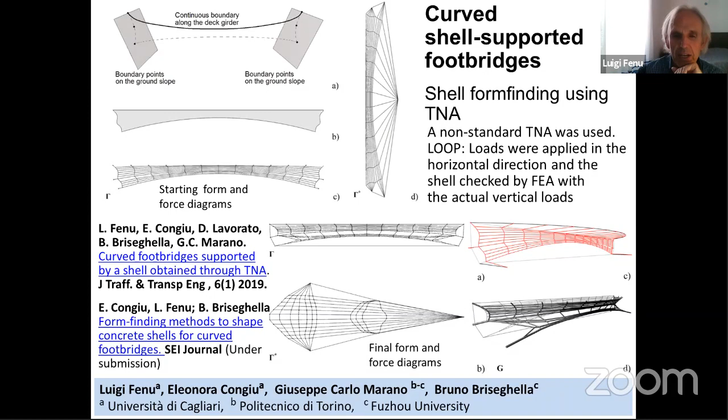We also used TNA, the thrust network analysis, but had to use it in a non-standard way, because in the standard block way of performing TNA we cannot apply it to a surface whose projection is superimposed. In the horizontal direction, the shell of the bridge has no superimposition between the different parts, so we applied the TNA in the horizontal direction, then checked by finite elements with the actual vertical loads, and again in a loop until we found good results.

Here we see what we are doing now: for instance, a shell-supported footbridge with curve and counter-curve of the deck, in some way following Schlaich's work. Here we see the form finding under both vertical and seismic loads. In particular, we are investigating how the seismic loads affect the shape of the shell supporting the deck.

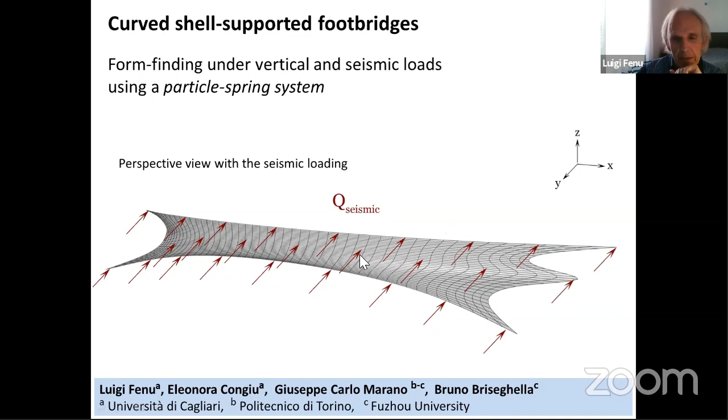Of course, it is necessary that the deck is not imposed as in the previous example, but the shape of the deck is affected by the seismic loads. So we see how increasing the seismic loads affects the shape of the shell and of the deck.

Thank you for your attention.

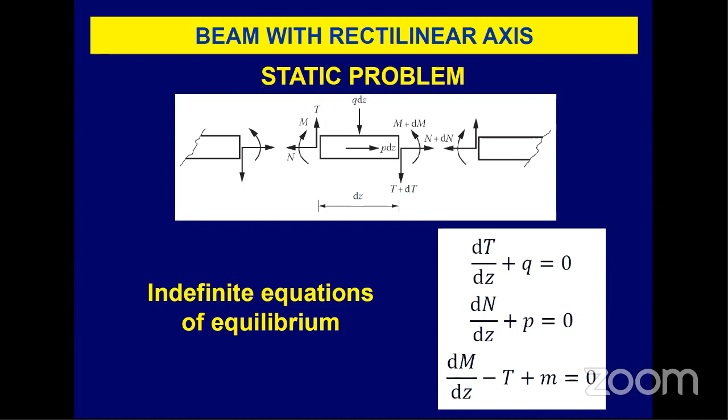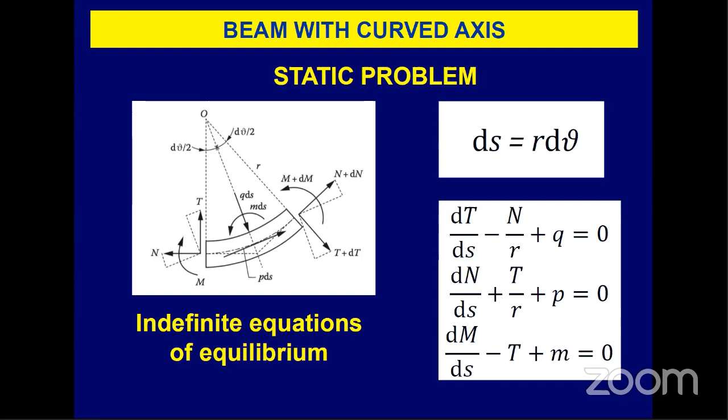The substantial difference is that we have two terms more. In the first equation we have minus N over R. In the second equation we have plus T over R. The other terms are about the same, of course.

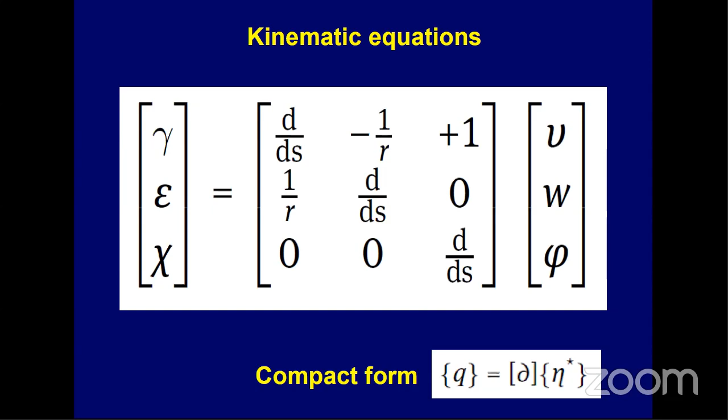So from these two very important examples, we see that the kinematic and static operators are adjoint to one another. They seem to be only the transpose, but we see that we have to change the sign. So in mathematics we say that they are each the adjoint of the other.

The next case is the rope. What does a rope mean? It's a beam with a flexural stiffness tending to zero. In this case the bending moment M and the shearing force are zero by hypothesis, so we reduce the problem to two equations in only one unknown, N, which is the axial force.

So we see now the two equations in scalar form: N over R equals q, and dN/dS equals minus P. This means we have two equations, so this single unknown has to satisfy two different equations. This means you have to have coincidence of the configuration of the beam with the thrust line or pressure line - we know that problem very well. But in this way we understand that the rope is really hypostatic, meaning it's free to move.

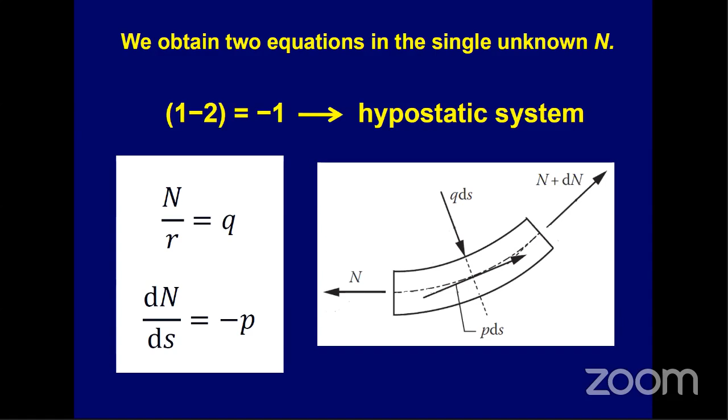So we've had this training on static kinematic duality because for our problem of shell of revolution, and also thin domes, it is very important. So we have the same type of operator matrix form. In the next slide, you'll see the formulation of the static equations.

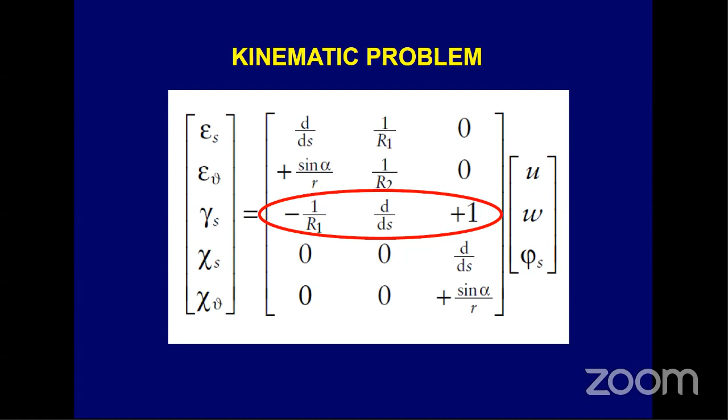In the next slide, we can observe that the most classical treatment of the problem, due chronologically to Flügge in 1934, Timoshenko, and Novozhilov in the 40s—all three are practically the same terms, but the third row was absent. In some way, they didn't consider gamma S, which is, of course, the shearing strain along the meridian. More generally, they didn't consider duality, even because at that time computational methods were not yet developed.

But that's not the cause. Even today it's not very clear—this problem of duality is not very well known. Please, the next.

So we arrive at the last topic interesting for us: thin domes or membranes. Exactly as for the rope, we have to put equal to 0 the flexural stiffness, and then the three static characteristics ms, m theta—the two bending moments—and ts. In this way we automatically have two equations in two unknowns. You see, practically we can say that the problem is not hypostatic as for the rope, but is isostatic, and it could be resolved, as is very well known, only with the help of statics.

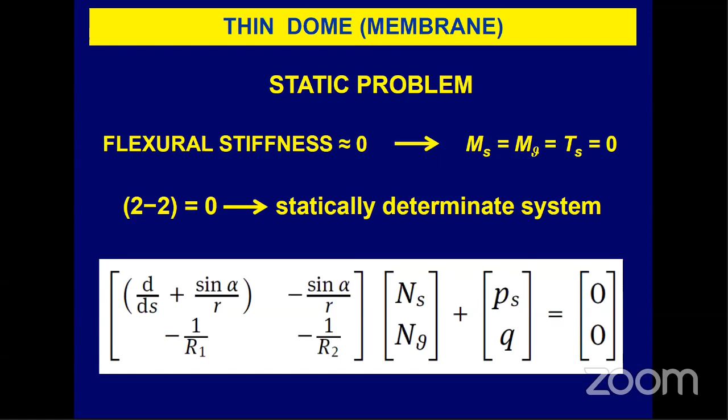We can also contemplate the problem of kinematics. You see that also for kinematics, the only deformations that remain are the two membrane dilations, epsilon s and epsilon theta. We have the adjoint operator, very simple, 2 by 2, and two displacements along the meridian and along the normal. So there is a duality. We could speak much longer about this interesting problem, but it's interesting to see that we have an isostatic problem. So I go to the conclusion.

The first conclusion, as we have already said, is that when the flexural stiffness tends to 0, the arch problem, which is isostatic, drops to the problem of the rope, which is hypostatic. In the same way, from the shell of revolution, which is twice hyperstatic, we drop to the situation of the membrane or thin dome, which is isostatic. This is the first important conclusion.

The second conclusion, which is the base for our computational investigation, is in the next and last slide. Two important remarks: the first is that when the thickness is about, or tending to, 0, we have a strong implication due to this duality—implication to funicularity, which means membrane regime only.

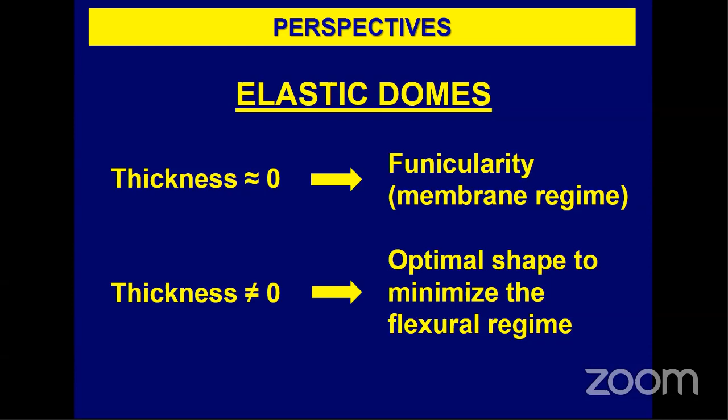May I? Please, Francesco. Yes, I've seen that Stefano also wants to ask, and maybe this is the same question, because we worked together on this topic. If Professor Carpinteri has some experience with the effect of boundary conditions, because he talked about the differential equation behind the shell structures, but we have seen together with Stefano that boundary conditions also matter a lot on the funicularity, of course.

Yes, in some way, if I can answer: I think you are right. The third parameter, just to not put things in the most complex way, I didn't mention the orientation of the constraint—rollers may be oriented in an optimal way, for example tangentially to the border of the shell. So I think it's quite simple to say that the optimal orientation is the one for which the roller behaves as a roller; there may be other constraints, but in that case there is not any problem, we eliminate it.